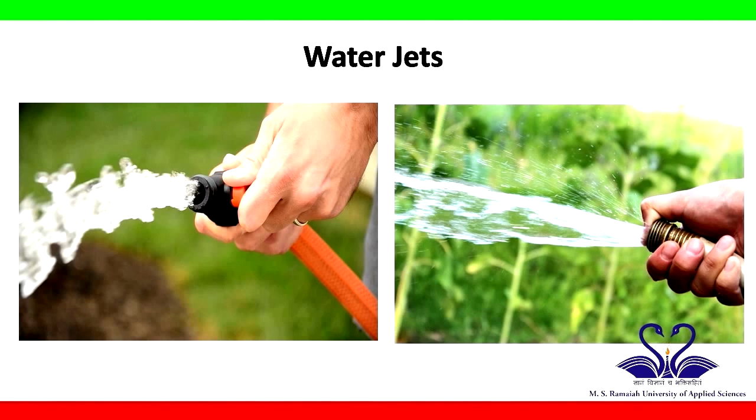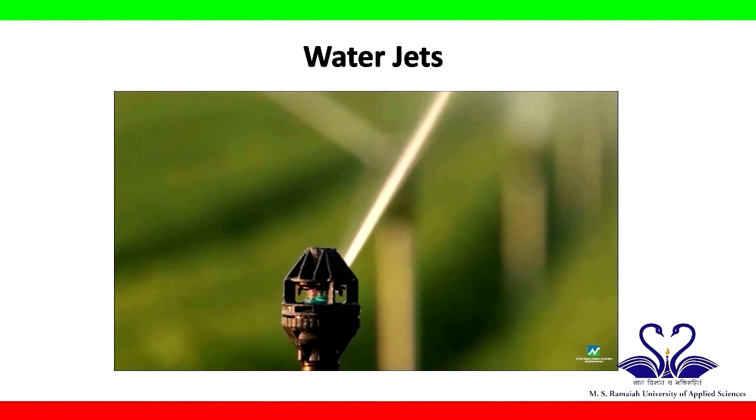Water jets are commonly used in day-to-day life. Take the example of a house tap that releases a water jet when open, or a garden hose used to irrigate plants at home. A network of sprinklers is generally used for irrigation in large-scale cultivation. A sprinkler is a nozzle device that converts fluid pressure into jet velocity.

A water jet is also used for entertainment. An excellent example is the musical fountain at Brindavan Gardens at KRS Dam.

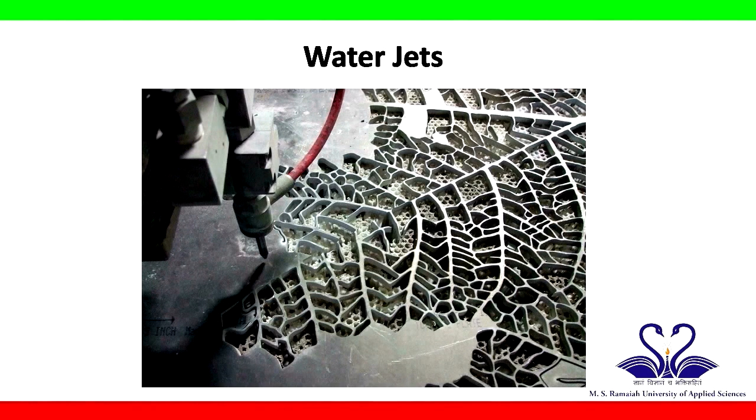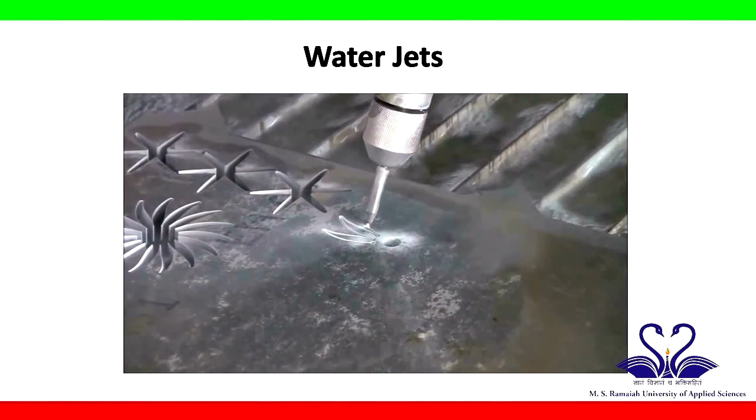When the jet of water comes in contact with a surface, it is termed as the impact of jet. A high impact water jet can actually cut through metals. Water jet cutting is also used in manufacturing, where water jets at high velocities are used to cut metals as thick as 2 inches.

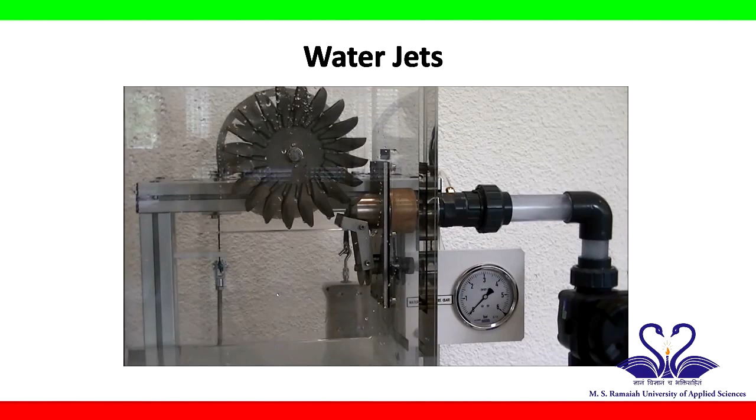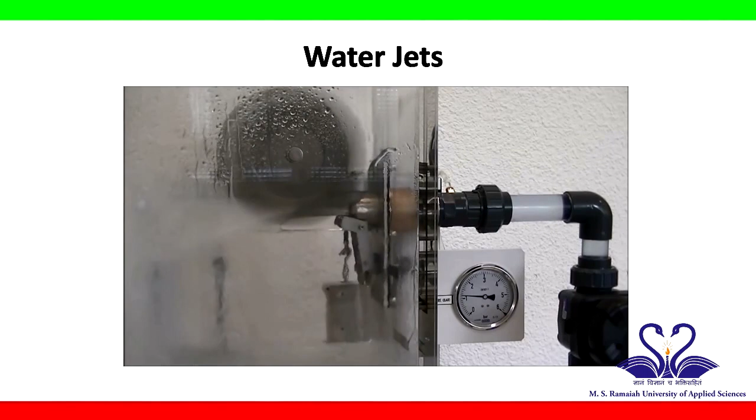Hydraulic turbines are devices that convert kinetic energy of a fluid into mechanical work. The shape of a hydraulic turbine blade is optimized for efficient utilization of the fluid energy from the water jet. The study of the impact of jets on vanes is necessary to understand the energy transfer from the water jet to the vane. Why do we need to concentrate on the impact of jets?

Let us look at the learning outcomes. At the end of the experiment, the student will be able to demonstrate the amount of energy transfer of a jet on a surface. The student will also be able to explain the mechanism of formation of jets.

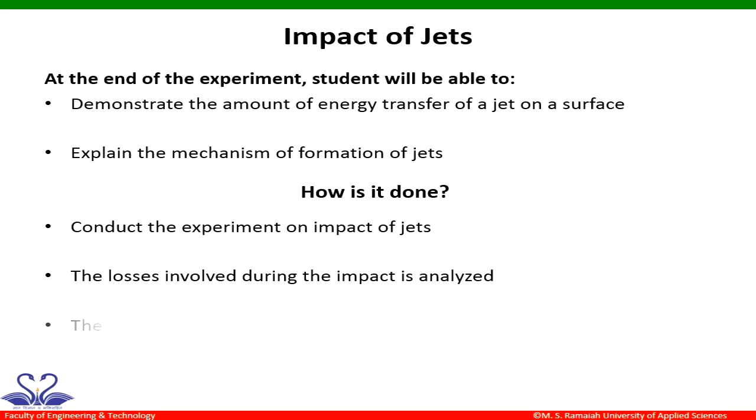But then, how is it done? We shall actually conduct the experiment on impact of jets. The losses involved during the impact are analyzed. The theoretical force of the impact is compared with the measured value.

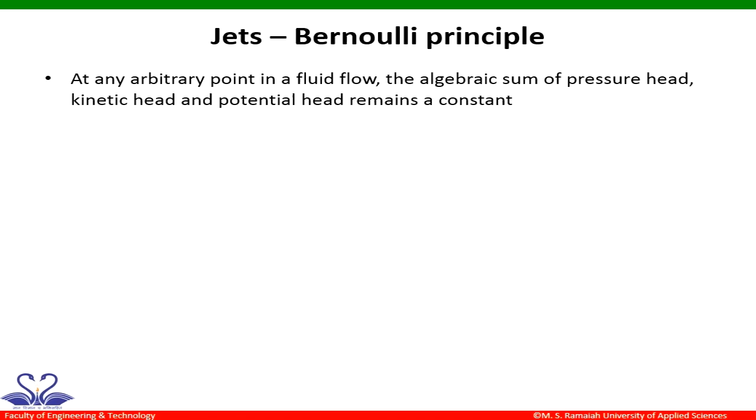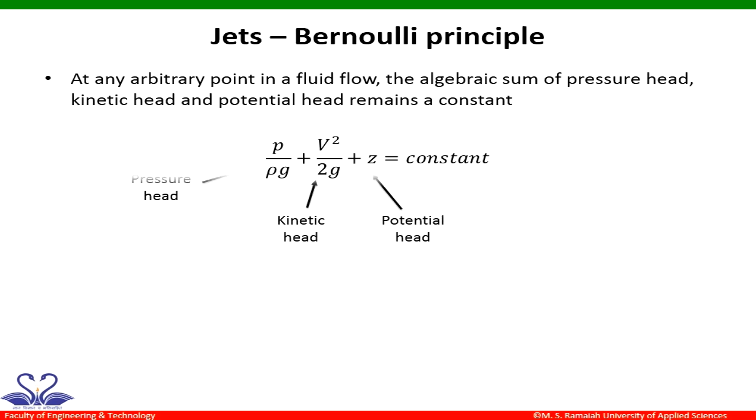Before that, how are jets actually formed? It follows Bernoulli's principle. The principle states that at any arbitrary point in a fluid flow, the algebraic sum of pressure head, kinetic head, and potential head remains constant, that is, P by rho g plus V square by 2g plus z equal to a constant. For this equation, we assume that the flow is steady, inviscid, frictionless, and incompressible.

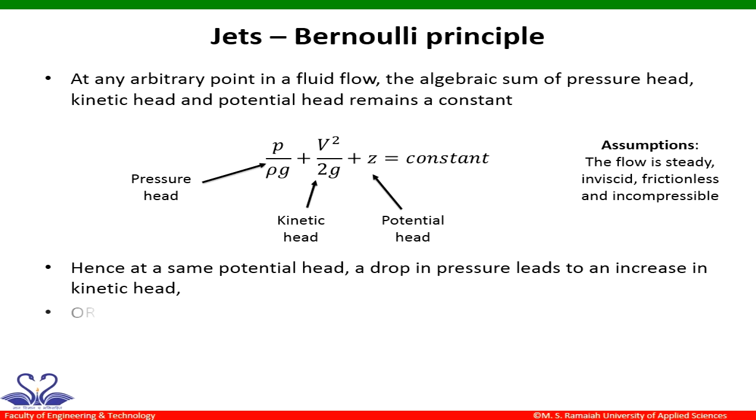Hence, at the same potential head, a drop in pressure leads to an increase in kinetic head, or in other words, forms a fluid jet of high velocity.

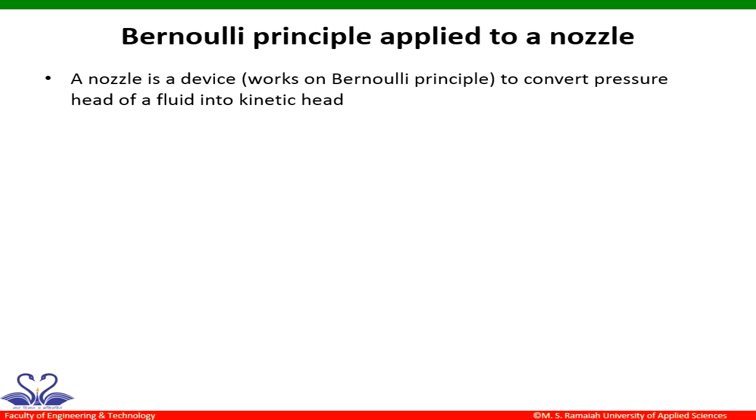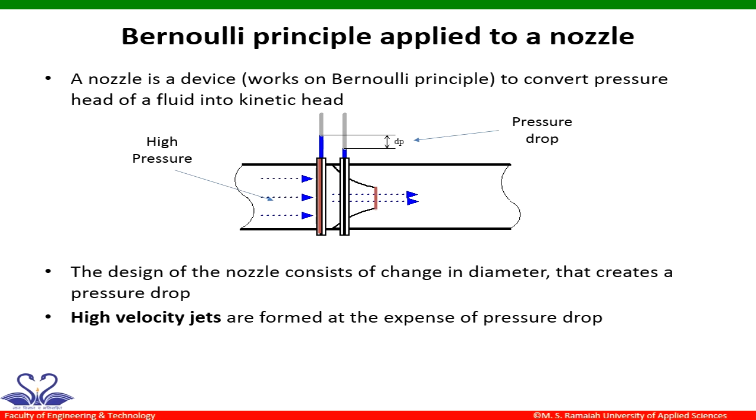Let us apply Bernoulli's principle to a nozzle. A nozzle is a device that works on Bernoulli's principle to convert the pressure head of a fluid into kinetic head. The design of the nozzle consists of a change in diameter that creates a pressure drop. Hence, high velocity jets are formed at the expense of pressure drop.

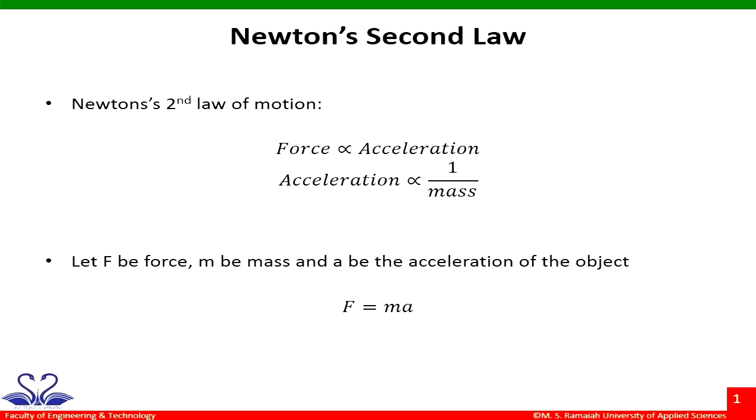We know from Newton's second law of motion that the force applied on an object is directly proportional to the acceleration of the object produced by the force. Also, this acceleration is inversely proportional to the mass of the object. If F is the force, m the mass, and a the acceleration of the object, we know that F equals m times a.

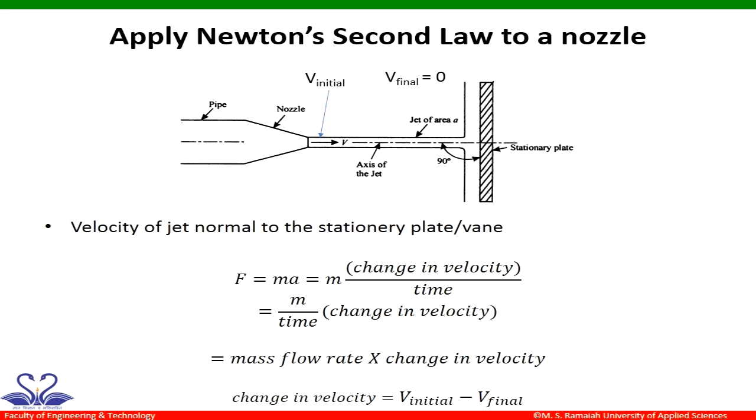Here, the change in velocity is the difference between the initial velocity and the final velocity. But the final velocity will be taken to be 0. By solving the equation, we get F equal to rho times a times square of velocity. This is the force of impact.

For a plate inclined at an angle theta, we will have resolution of forces. There will be 3 forces: one normal to it, one in the x direction, and one in the y direction.

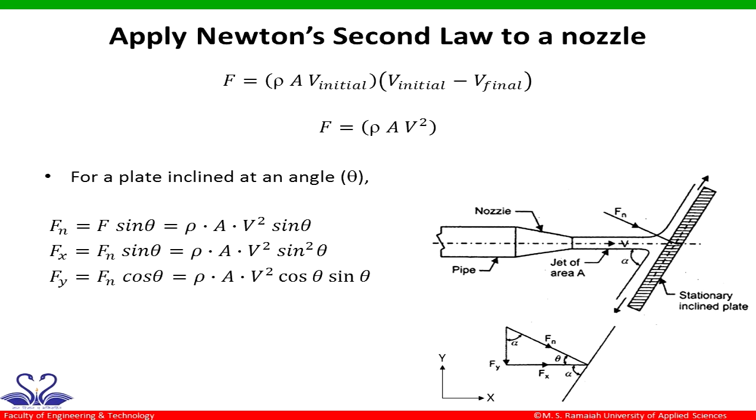The expression for normal force is rho times a times square of the velocity, multiplied by the sine of the angle. The force in the x direction is rho times a times square of the velocity into square of the sine of the angle, and the force in the y direction is rho times a times square of the velocity multiplied by the cos of the angle and the sine of the angle made by the plate to the axis of the jet.

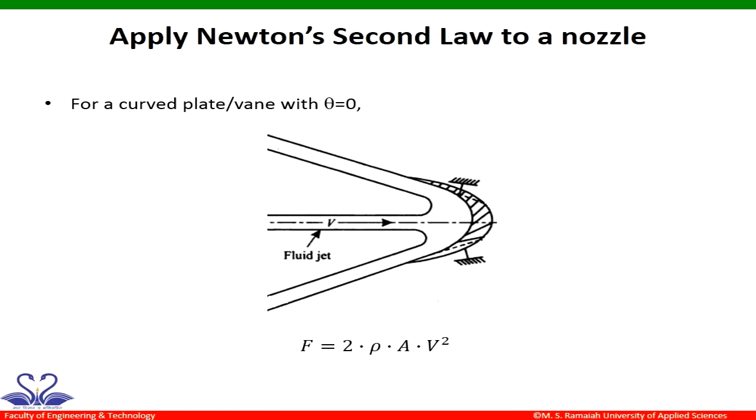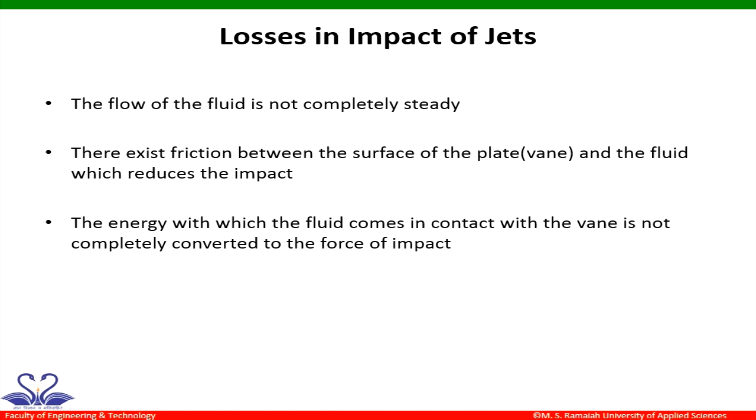The flow of the fluid is not completely steady. There exists friction between the surface of the plate and the fluid, which reduces the impact. The energy with which the fluid comes in contact with the vane is not completely converted to the force of impact. Hence, the actual force of impact is lower than the theoretical force derived.

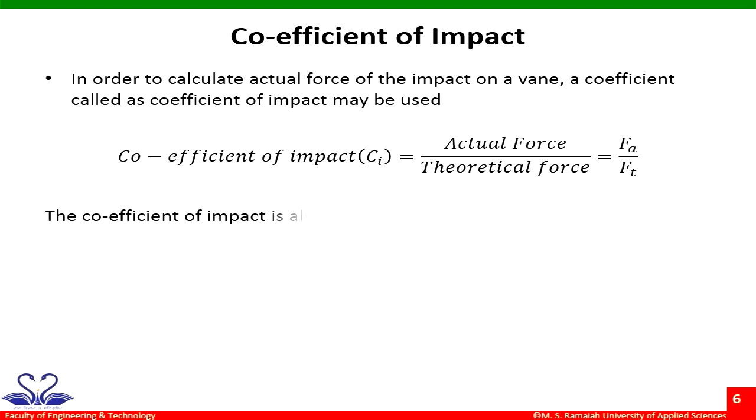In order to estimate or evaluate the actual force of the jet impacting on a surface, we may use a coefficient defined as the coefficient of impact as Ci, which is the ratio of actual force to the theoretical force. We must know that the coefficient of impact is always less than 1.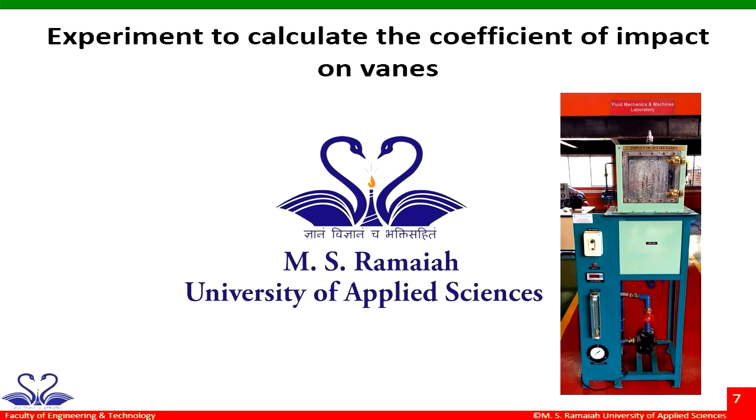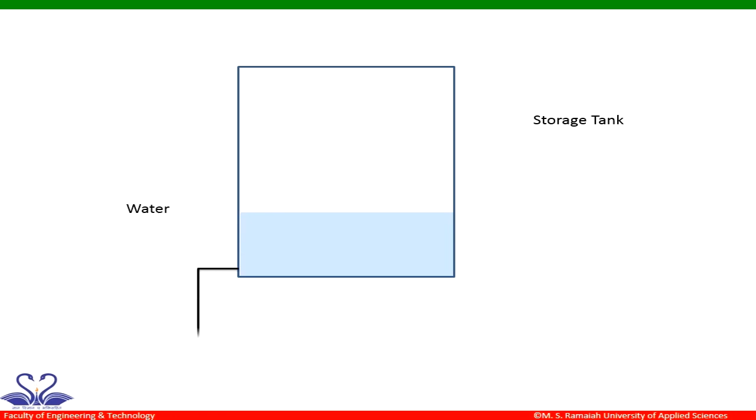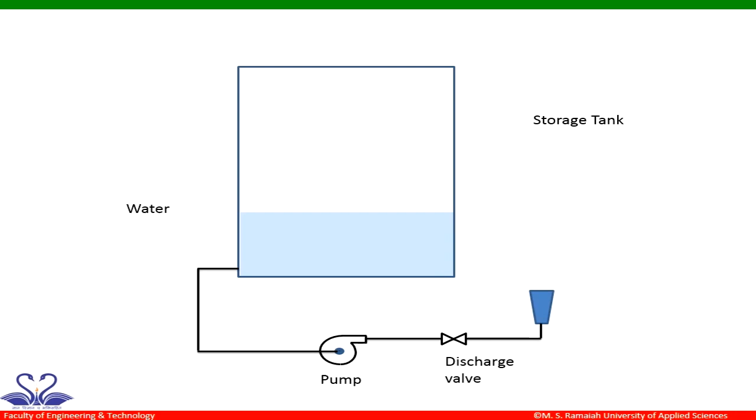The experimental setup consists of a storage tank for water storage. It is connected to a centrifugal pump to pump the water. A discharge valve at the downstream of the pump is used to control the flow rate of water. Further, it is connected to a flow meter. Here, we use a rotameter to indicate the volumetric flow rate of the water.

A nozzle has been fitted on the piping to generate water jets. 3 nozzles of varying diameters, 4 mm, 6 mm, and 8 mm can be fitted on the piping to vary the diameters of the jet.

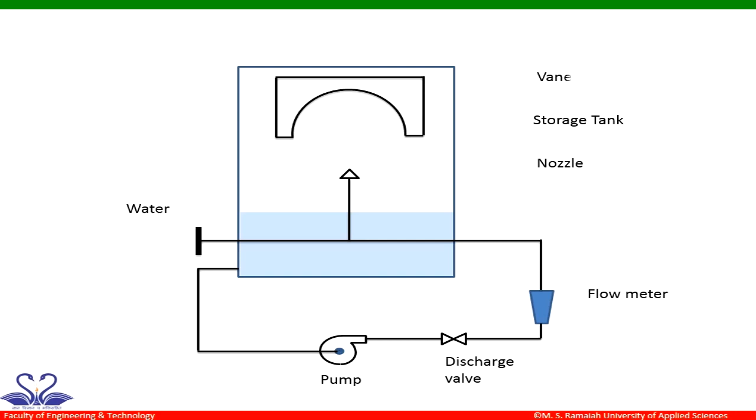It consists of a stationary vane receiving the impact of water jets. Further, it is connected to a load cell from the stationary vane that can directly give an indication on a digital scale of the actual force of impact due to the water jets on vanes.

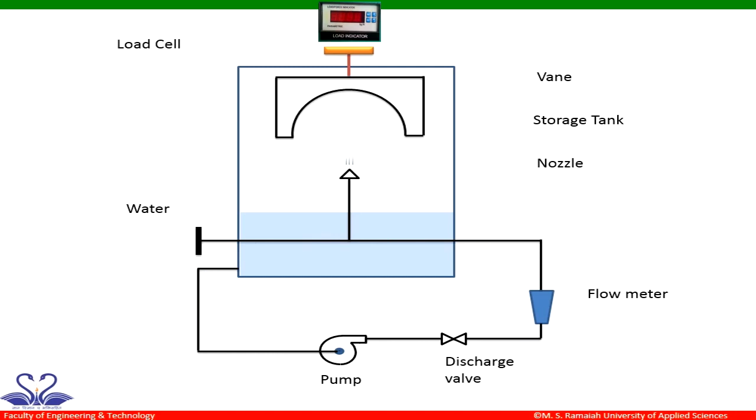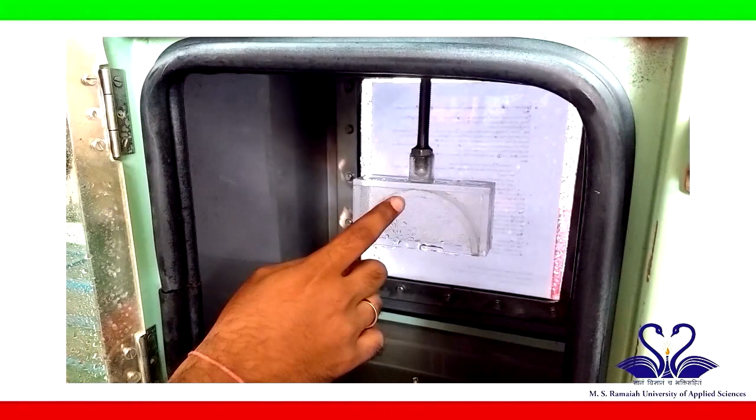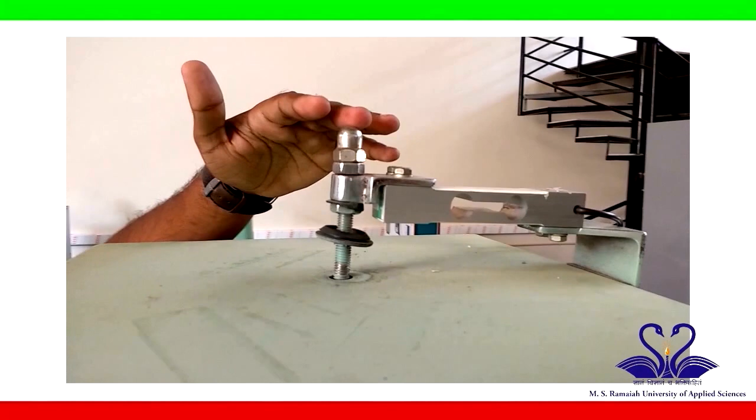This is the experimental setup to calculate the impact of jet on vanes. Now if you see inside, we have a nozzle from which a fluid of high velocity comes and impacts a stationary vane. This stationary vane is connected to a load cell shaft, which in turn is connected to a load cell which will give the value of the force of impact, and this value can be read on the digital scale over here.

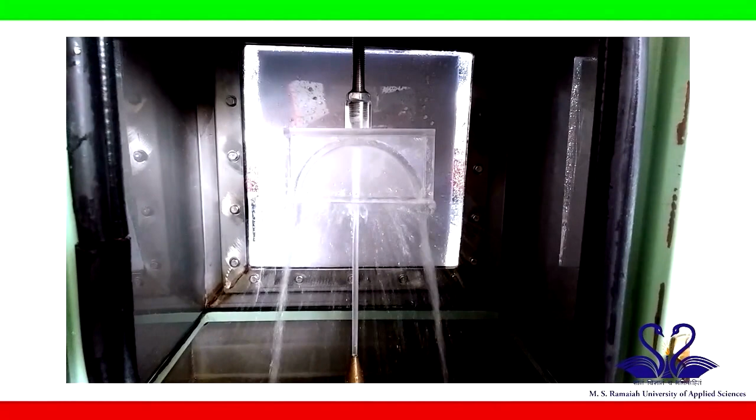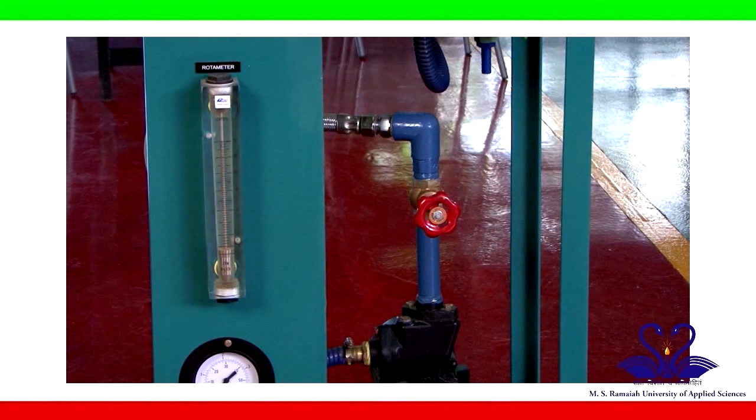In order to create the high velocity of the fluid, what we have here is a sump tank to store the water. This is the pump which will take the suction from the sump tank, and then from the discharge we have a discharge valve which is connected to a flow meter. Through the flow meter we can control the flow rate of the fluid that is flowing through the pipeline, which is finally coming towards the nozzle.

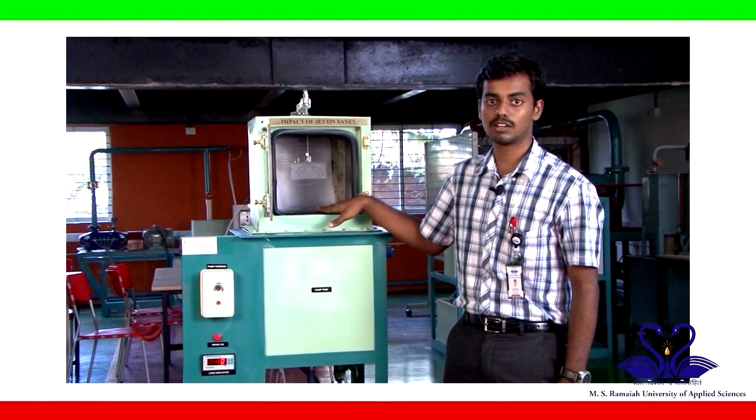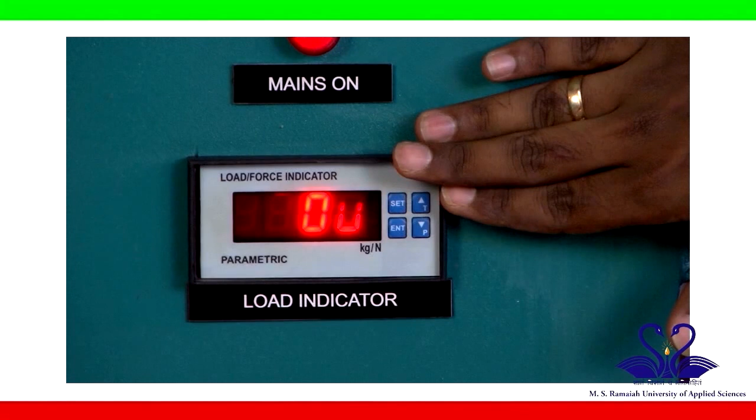And because of the nozzle construction, we get a very high velocity of the fluid. So this high velocity fluid comes and impacts on the stationary vane with some force of impact. So that force of impact can be sensed by the load cell, and that force will be actually shown in the load cell value.

Here I have fixed a 4 mm nozzle and a hemispherical vane. In our setup, we are having 3 types of vanes. One is a hemispherical vane, and another 2 are inclined flat plate and perpendicular flat plate vanes. So for now I have fixed a hemispherical vane.

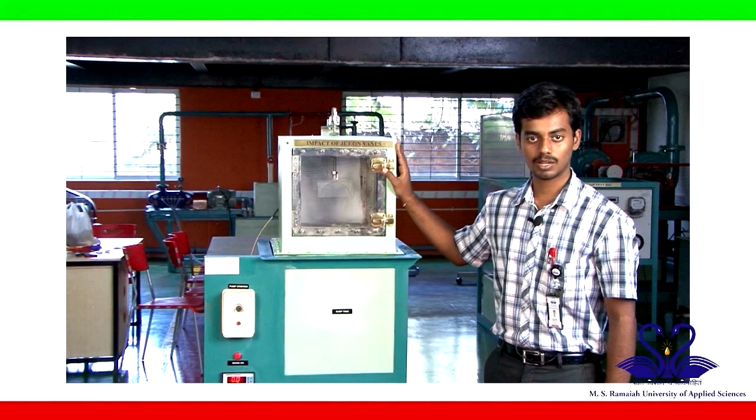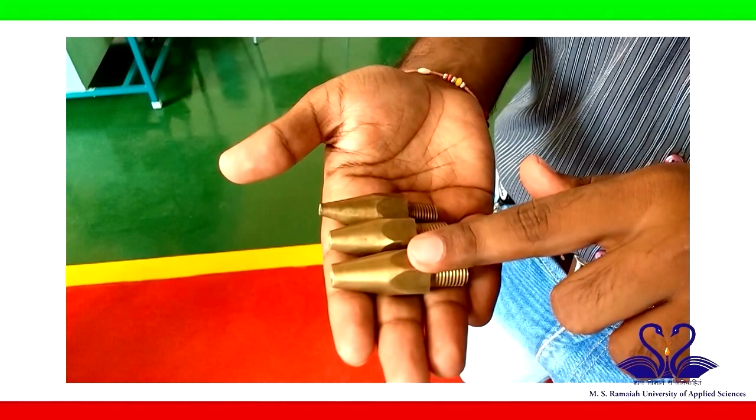And in the nozzles, we are having three types of nozzle diameters. Right now, I have fixed a 4 mm nozzle. Also, we are having a 6 mm and an 8 mm nozzle. This is a 4 mm nozzle, this is a 6 mm nozzle, and this is an 8 mm nozzle. The difference in the diameters will have different jet velocities. The lowest diameter will have higher jet velocities when compared to the higher diameter nozzle.

Now, before conducting the experiment, we have to calibrate the load cell.

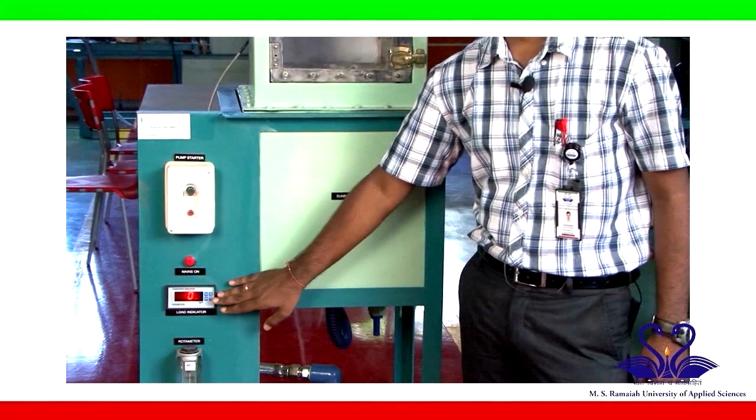We need to make sure that this value is showing 0, 0. If not, then we'll have to calibrate it. Right now, as it is showing 0, 0, let us go ahead and start the experiment.

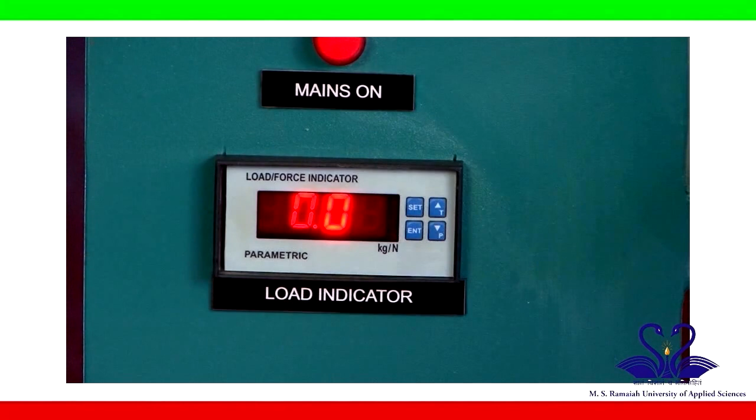I will be starting the pump and then controlling the discharge valve to a flow rate of 15 liters per minute.

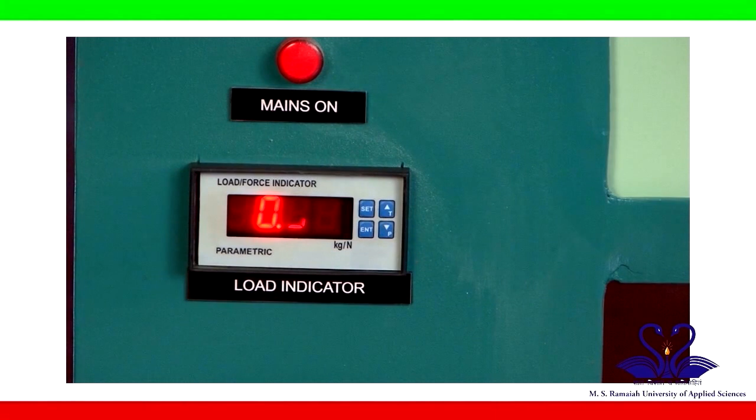I have set the flow rate at 15 liters per minute and the fluid is exerting a force on the vane. This scale is showing a value of 0.33 kgs. So this is the force of impact of the fluid being exerted on the hemispherical vane.

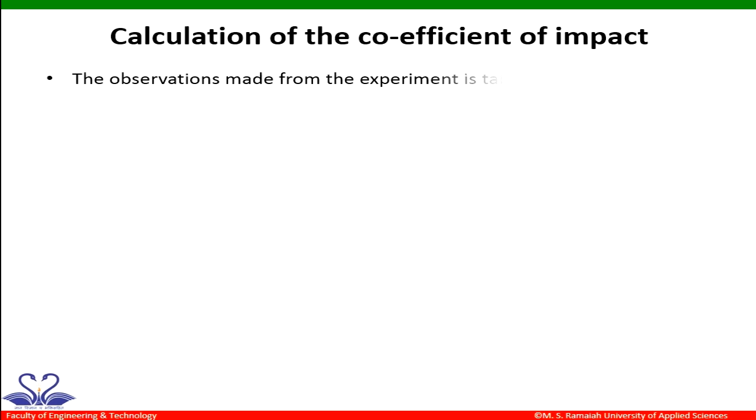Let us calculate the coefficient of impact. The observations made from the experiment are tabulated: for a flow rate of 15 lpm, the nozzle diameter being 4 mm, the load cell returned a value of 0.33 kg.

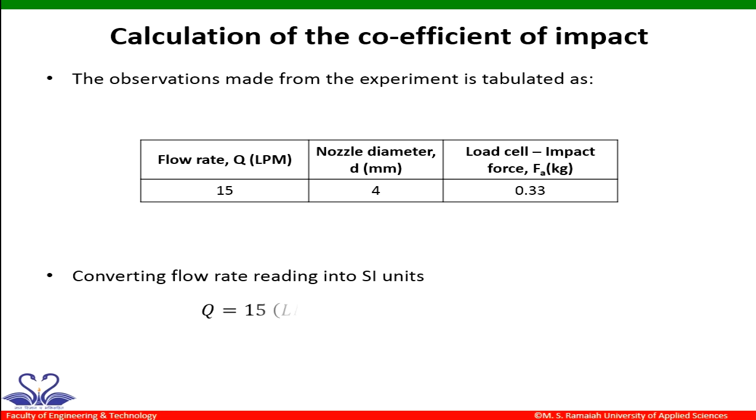Converting the flow rate into SI units, we get 2.5 into 10 to the power minus 4 meter cube per second.

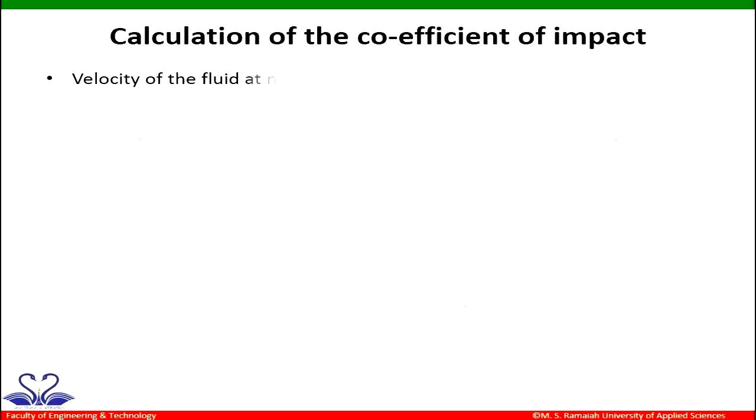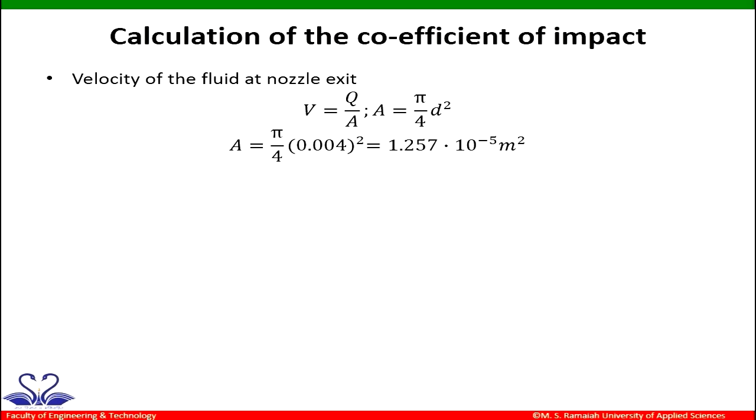The velocity of the fluid at the nozzle exit is calculated as V equals flow rate by the cross-sectional area of the nozzle, and the velocity is found out to be 19.89 meters per second.

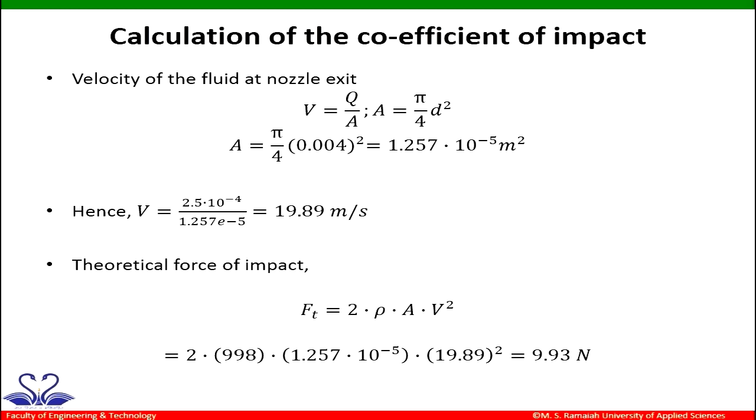The theoretical force of impact for a curved vane with theta equal to 0 is 2 times rho times area into the square of the velocity. Further, by calculating, we arrive at a theoretical force of 9.93 newtons.

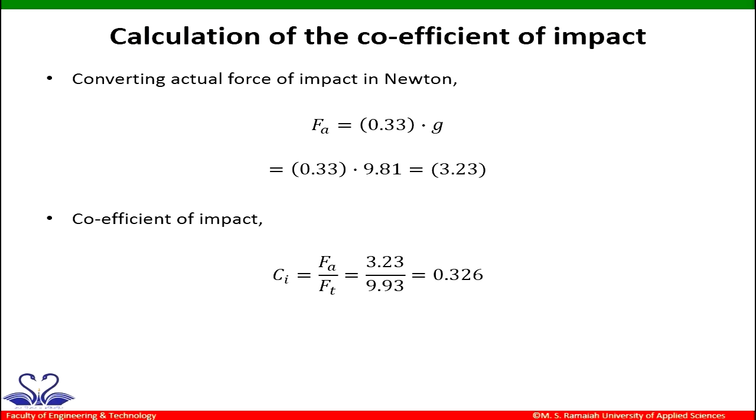The actual force of impact, which was in kgs, is converted into newtons, which is 3.23 newtons. Hence, the coefficient of impact is found to be 0.326. The same experiment is repeated for varying flow rates and for different vane geometries.

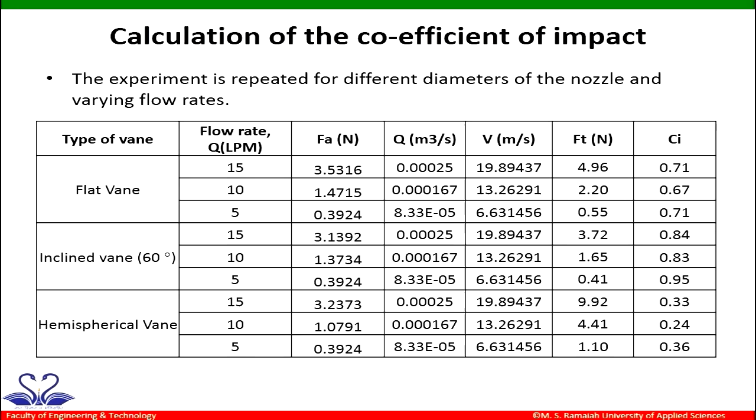The different vane geometries used are a flat vane, an inclined vane at an angle of 60 degrees, and the hemispherical vane. The calculations for the coefficient of impact have been made and tabulated in the table.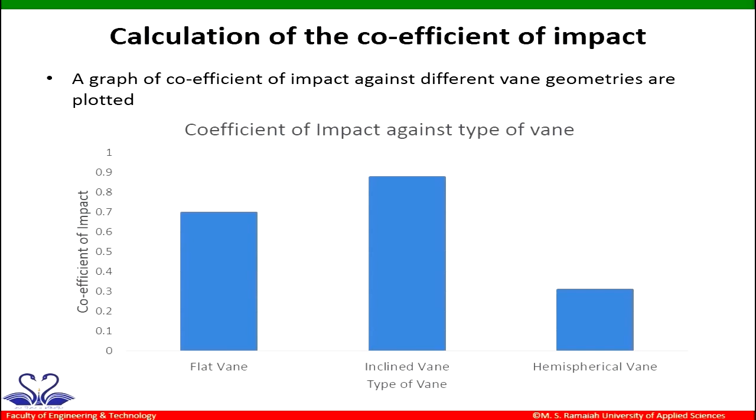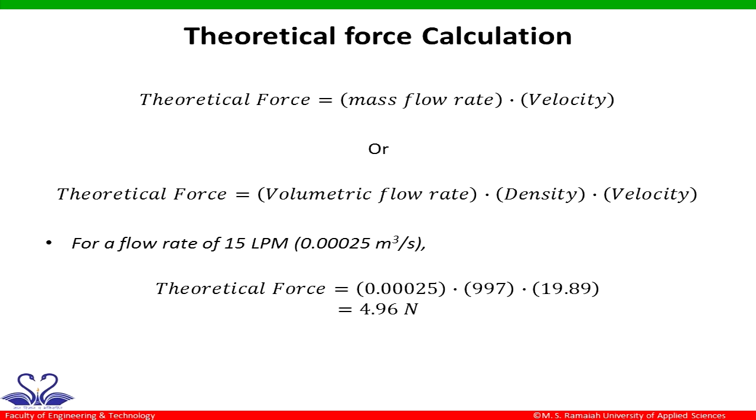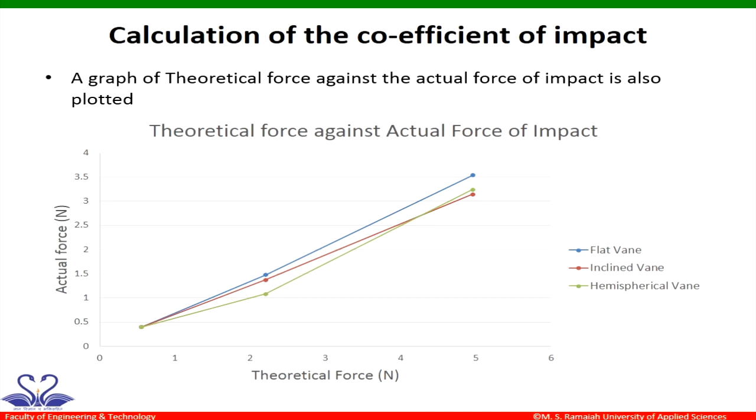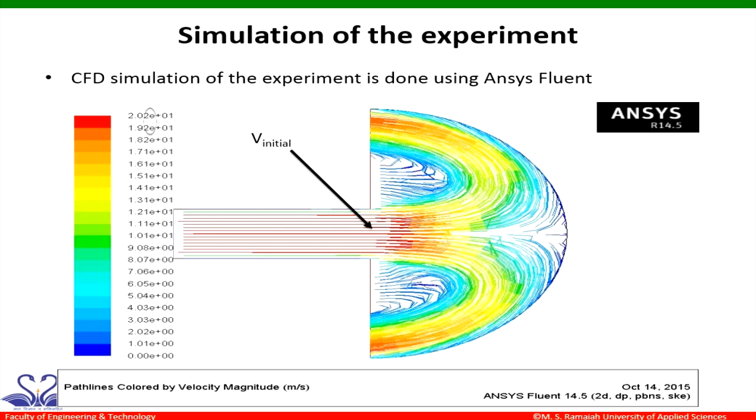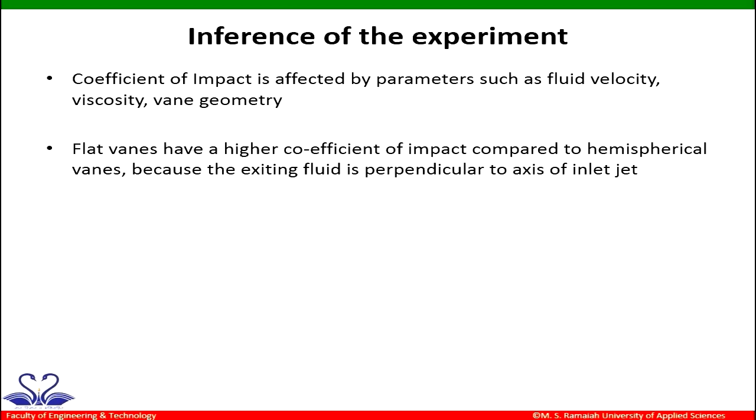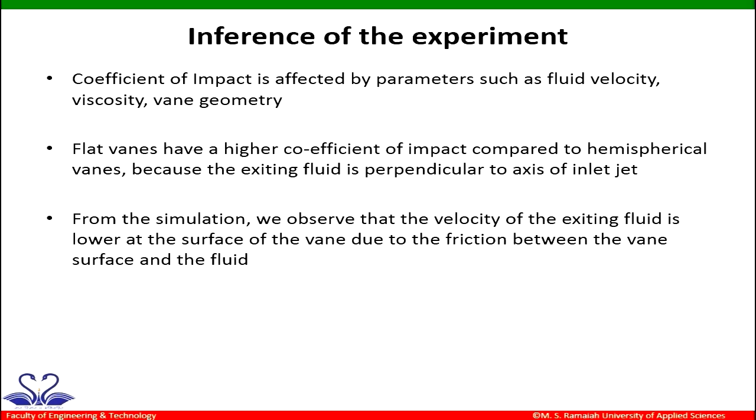From the simulation, we observe the velocity of the exiting fluid is lower at the surface of the vane due to the friction between the vane surface and the fluid, which could again add to the loss of the force of impact. That would be the further learning.

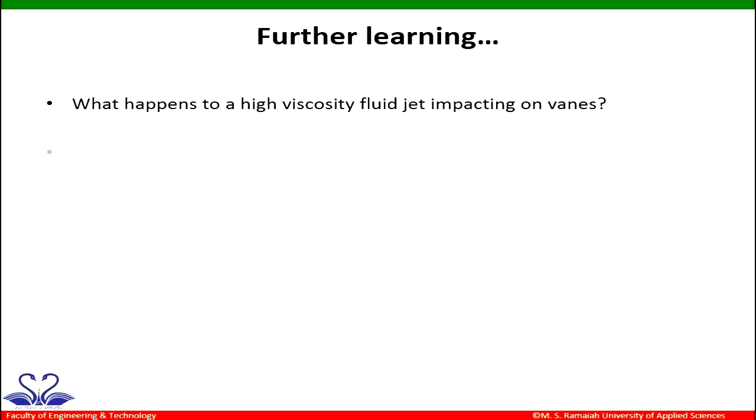Let us address some of the following questions. What happens to a high viscosity fluid jet impacting on a vane? Now, considering different vane geometries, what is the behavior of the impact force? If the vane was not stationary, what would be the result of the impact?